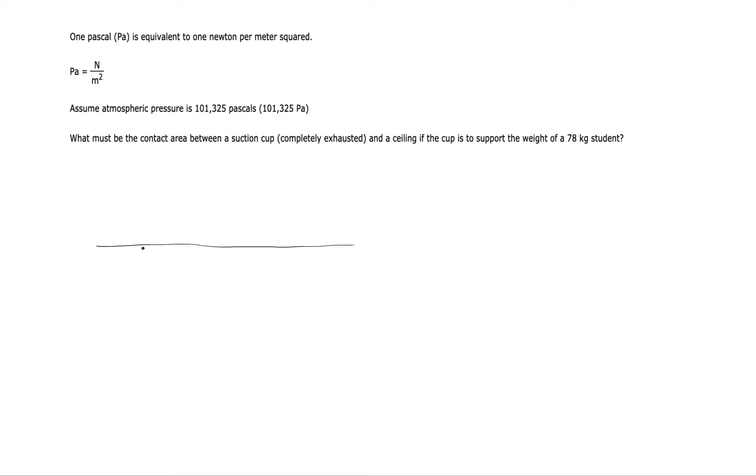So this one is about a suction cup, and the thing about a suction cup is when you place it against some surface, there's going to automatically be a certain amount of air inside, and there's air outside too.

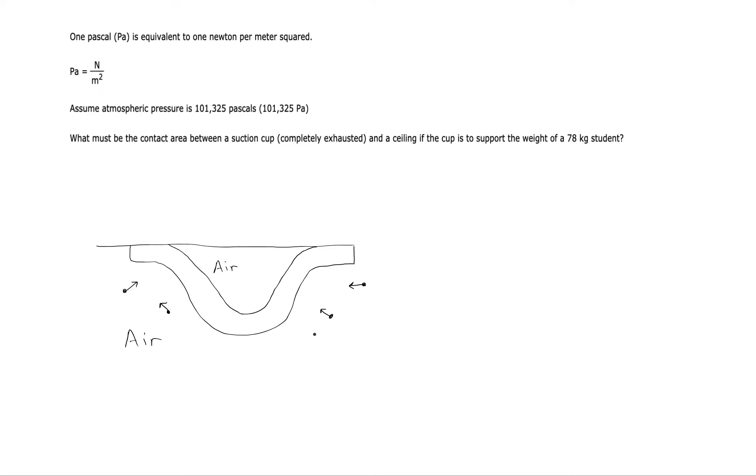And it's hard to believe, we don't feel it when we're just sitting here, but there's quite a bit of pressure due to the air around us. We can't survive in space because there's not enough pressure to keep our bodies at the normal state that they're used to being in. So if you remove the pressure, it's a problem.

And that's the idea behind the suction cup, is that there's a pressure outside which is equal to atmospheric pressure, which is 101,325 pascals. Quite a bit of pressure there. And then when the thing is not evacuated, the pressure inside is also at atmospheric pressure of 101,325 pascals. And then the suction cup wouldn't be expected to stay in that position.

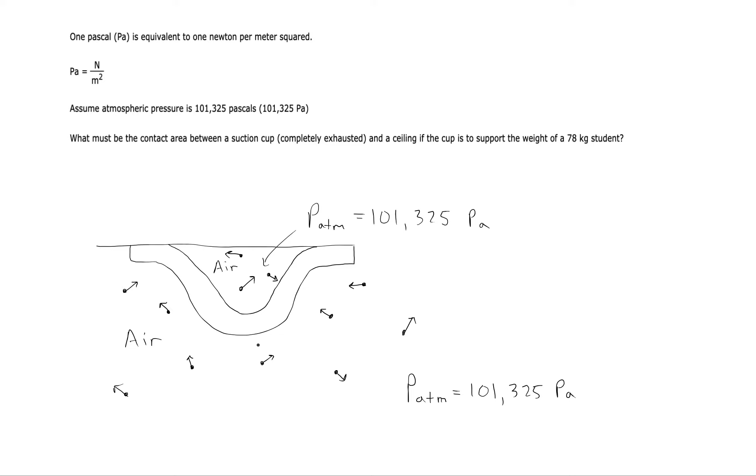It would just fall down because there's air particles inside. And it's all about how often and how hard the particles hit the surface. And so if they're hitting the surface from the outside and they're hitting the surface from the inside, then it all cancels out. There would be a weight that suction cup would have, and it wouldn't have any reason to be attracted to the surface that it's touching right now.

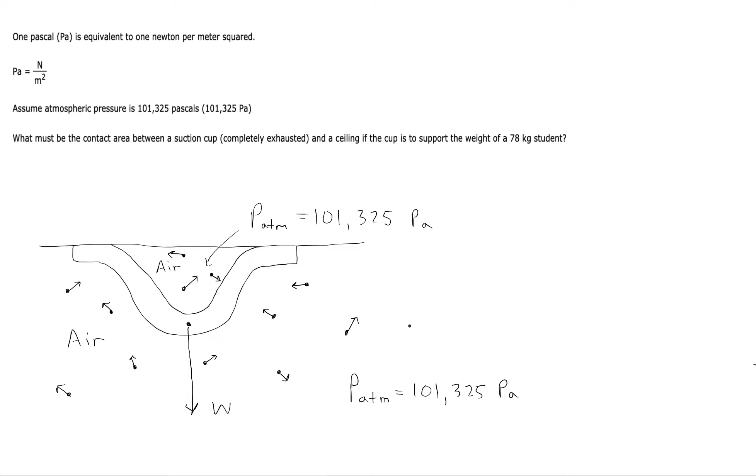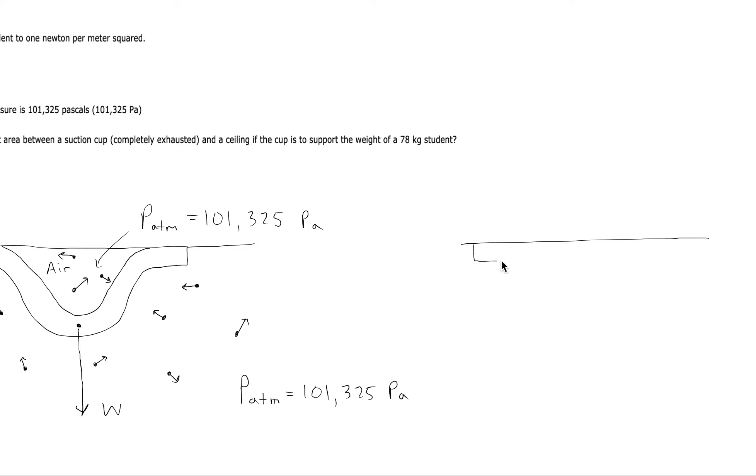But what if you evacuate it by pushing? You push the air out, create a vacuum inside. What would it be like then? Well, then we could create a space in here where there's a vacuum. But you still have air on the outside colliding with the object.

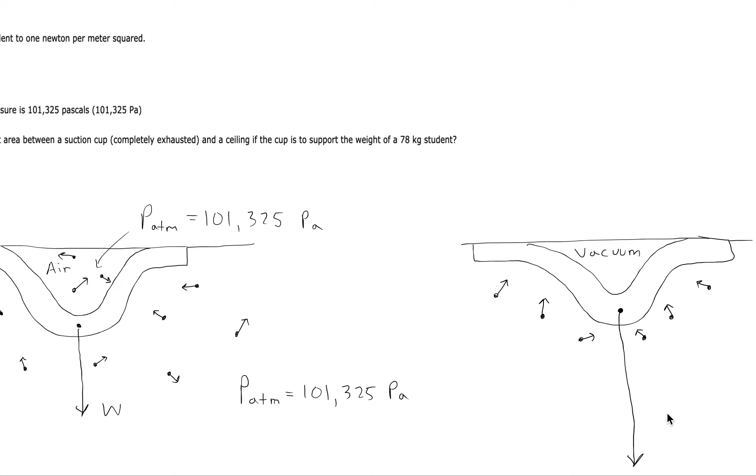Alright, those tiny forces that it feels add up. They could add up so much that eventually there could be an upward force as well as a downward force. Now, they're saying that you're going to hang something from the suction cup. The suction cup's weight itself is not really that significant. But it could be significant if you put a force of tension by hanging something from it, mass of a student times g.

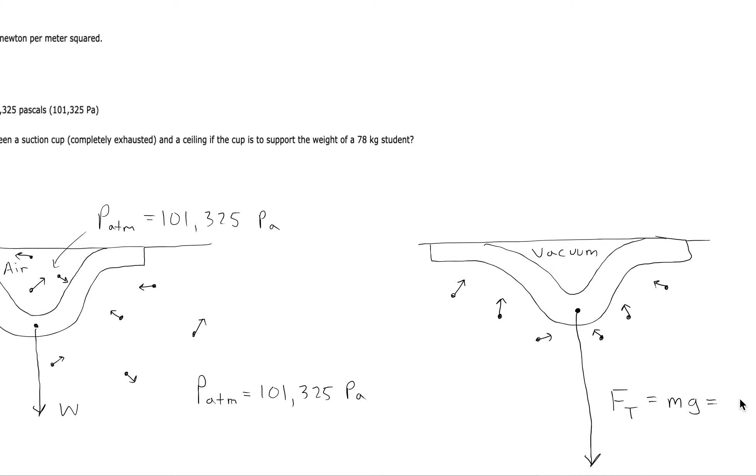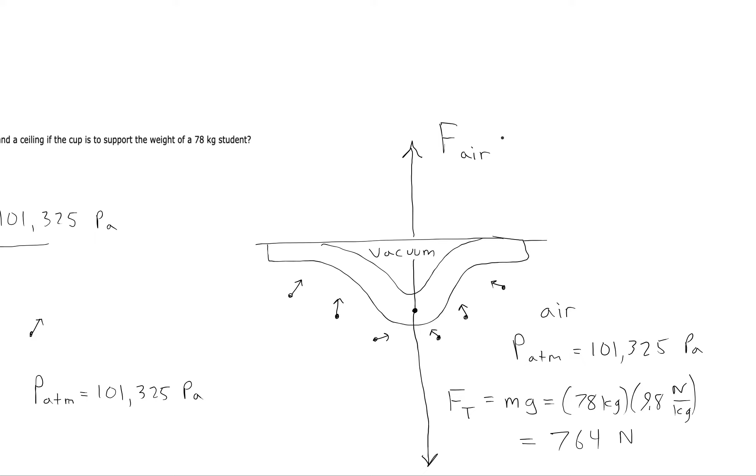So let's calculate what that force of tension would be. It would equal the person's weight, 78 kilograms times 9.8. So that's going to be 764 newtons. Alright, now we need the suction cup to create an equal and opposite upward force. But the suction cup doesn't really create it. It's the air outside that does, and the pressure from that air. And so we want an upward force of air, basically, to equal 764 newtons.

Alright, so we want to use the pressure formula for this. So pressure equals force divided by area. We know the pressure of the atmosphere is 101,325 pascals. It tells you that it's going to push on things with that many newtons per square meter. And so we know the force that we want, 764 newtons. And we just don't know the area that's required. So the surface area of the suction cup is what we'd be finding then.

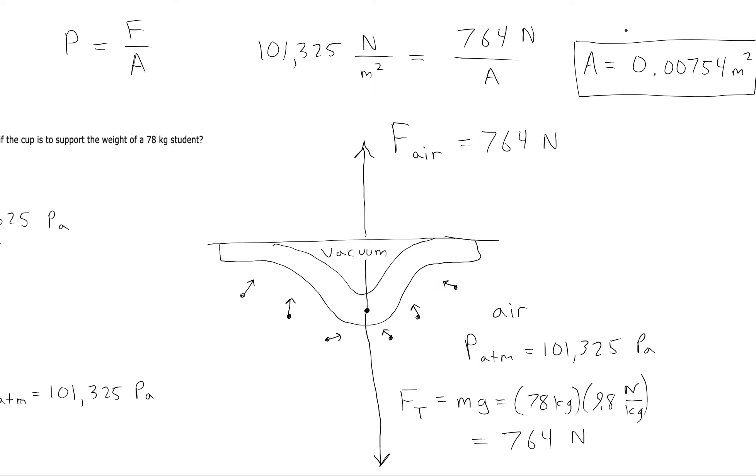So you just cross multiply: 0.00754 square meters would be the answer. Now, how many square centimeters is that? Just because it's hard to conceive of how big that is. Let's see, it would be, move the decimal 4 places, 75.4 square centimeters will do it.